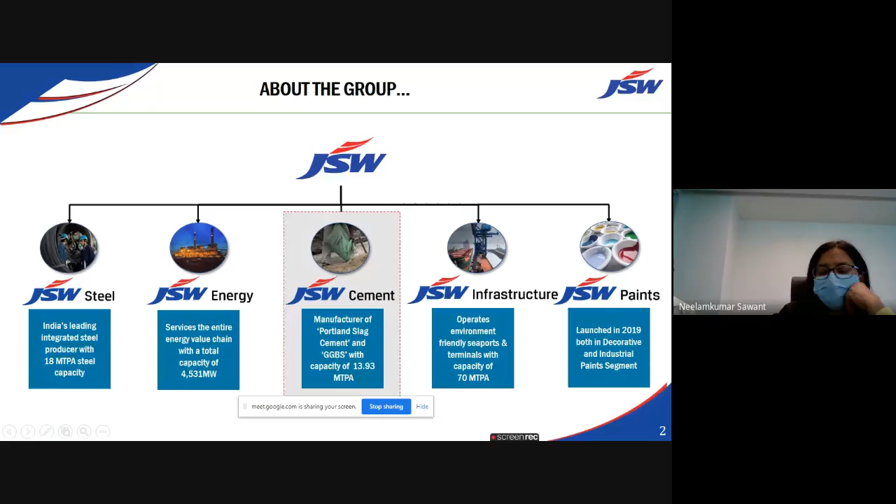We are into JSW Infrastructure in ports and terminals with capacity of 70 million ton per annum. In 2019, we have also launched paint. The paints are launched in the southern part of the country and west. So we go on to the vision and the core values of the group. Vision is global recognition for quality and efficiency while nurturing the society. Mission is supporting India's growth in core economic sector with speed and innovation, and core values are transparency, strive for excellence, and passion for learning.

So what are the various products JSW has which are green, environment friendly and have got very low carbon footprint? First is Portland slag cement, which is conforming to IS 455. Second is another variant of Portland slag cement, that is Concreel HD, also conforming to IS 455. Portland composite cement, conforming to IS 16415. Screened slag, IS 383. We are actually utilizing the slag which is coming out of the blast furnace, and that can also be used as a sand replacement.

So we all know, especially in the northern part of the country and also in the western part, sand is a big problem. Even in the south it has started. Getting river sand is practically impossible, and we should not get it because there are a lot of implications to taking sand out of the riverbed. It leads to the change of direction of the river, and it changes the topography of that area, not to say it spoils our mother nature.

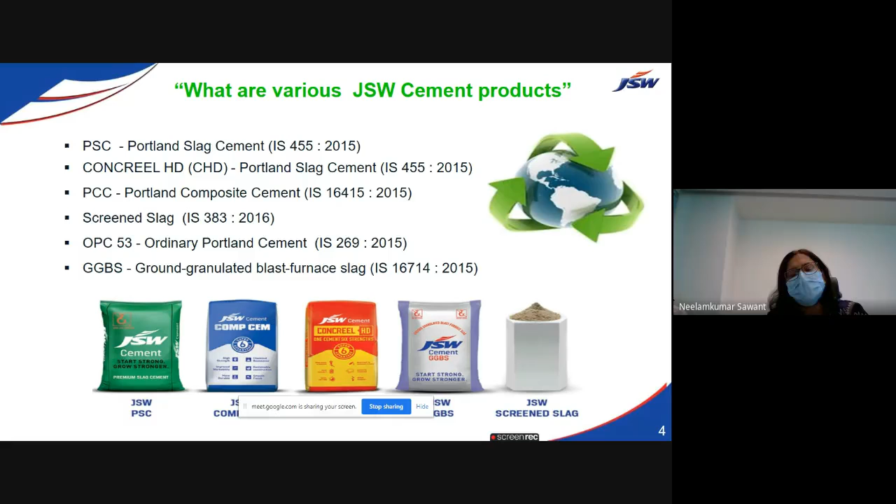So the chemical composition of slag as per IS 12089 and IS 16714. We can see it's a non-metallic product. It consists of silicates and aluminates of lime developed simultaneously with iron in the blast furnace, obtained by rapidly chilling or quenching with water or steam and air. Silica percentage is 27 to 32. The best part is this slag is equal to hydraulic cement because of the calcium oxide, the lime content, which is approximately 30 to 40%. If we compare slag with fly ash, you will see that the calcium oxide percentage in fly ash is less than 2, whereas in GGBS it is in the range of 30 to 40%.

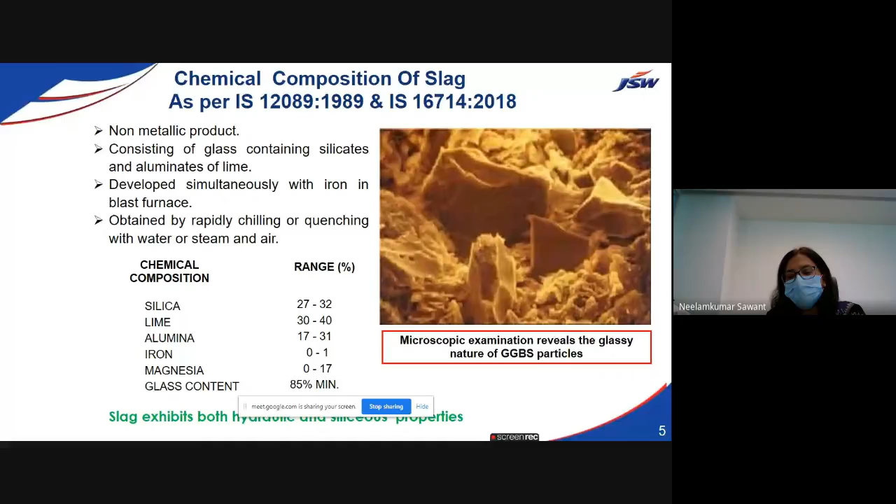Along with that are alumina, iron, magnesia, and the glass content is 85% minimum. The JSW slag GGBS glass content is between 90 to 97.5%. You can see the microscopic examination of the glassy nature of GGBS particle — highly reactive, highly siliceous, and also having a very good amount of calcium oxide.

Because it is a product of an industrial byproduct, it is a controlled byproduct. The steel which comes obviously goes through a very stringent process, and the slag which also comes out has a very, very high level of quality control and is of superior quality. There is no source to point source variation — it will be the same throughout the period of the year, as the iron ore source is fixed.

This conforms to IS 16714. This is a green product — CII and IGBC have given GGBS a Green Pro certification, and we have also got an Environment Product Declaration. This involves conservation of natural resources because it has been made from an industrial byproduct which, if not utilized, would have created a lot of problems in the earth's crust, as it would have been dumped and not utilized.

So this can be used as a partial replacement of OPC cement in concrete production at ready-mix concrete batching plants and site batching plants through high efficiency mixers. Utilization of GGBS will give high strength, chemical resistance, maximum durability, along with reduction of the heat of hydration.

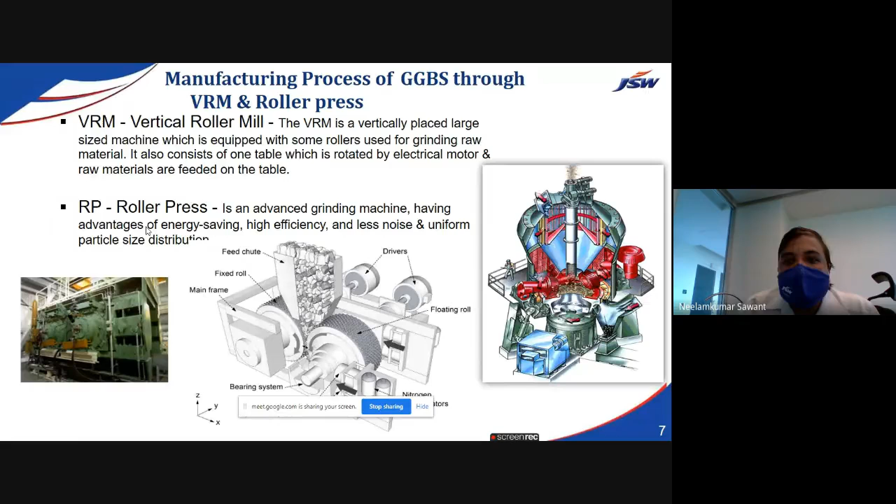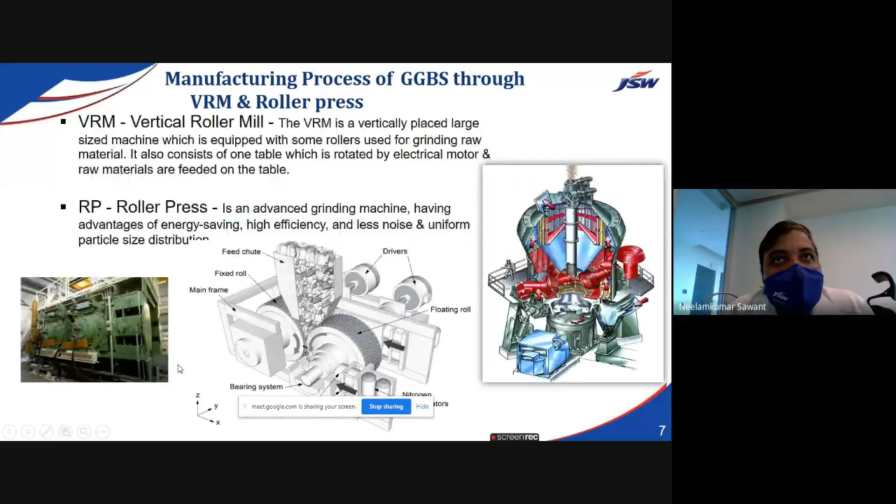So this is one of the pictures you are watching — on the right hand side is a vertical roller mill, and on the left hand side is a horizontal type of roller press machine. These are installed in our grinding units. One of the grinding units is located in Maharashtra.

We will see these are GGBS and fly ash. Both are cementitious products — they can be called mineral admixtures. Nowadays we are using plenty of these things, and GGBS has the IS code 16714 as previously stated, while fly ash has the IS code about 3812.

These are basically substances which are not chemically manufactured. As you know, in the morning's first session, there was a session taken by Kota Thermal Power where they described fly ash. Now we are more concentrated on GGBS.

So it is obtained by quenching the molten iron slag that you have seen in the previous slide. It is a byproduct of steel, and this blast furnace slag is quenched with a jet of water, then cooled down, and again ground down to a fine powder. That is called GGBS or GGBFS — ground granulated blast furnace slag.

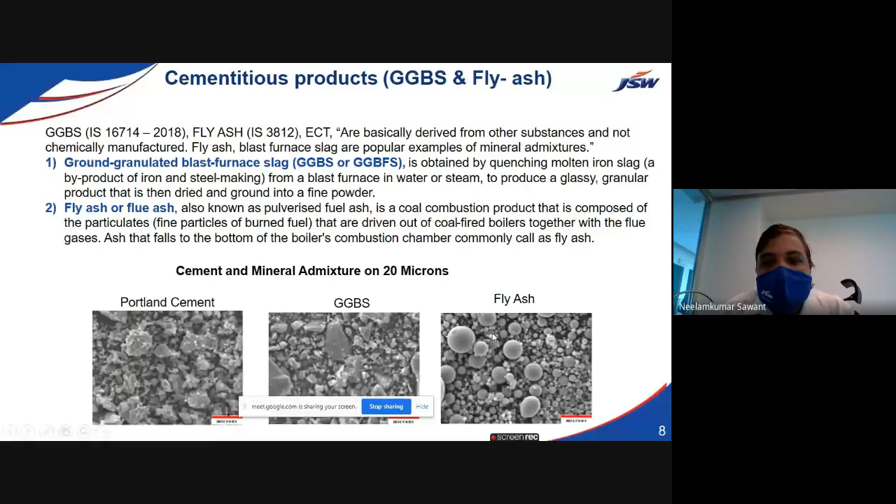We will see the GGBS versus fly ash comparison. The chemical composition, as ma'am Lopamudra told, this GGBS is having glass content more than 90 to 95% in our JSW product. So we will see calcium oxide in a normal cement clinker: 100% OPC has 62% CaO, that is calcium oxide, but as far as GGBS is concerned, it is about 40%, then silica content is about 35%, then aluminum oxide 14%, then magnesium oxide that is 8%, and ferrous also 0.5%.

These are the comparative figures shown in a table. We can observe the oxide content of 100% OPC as well as PSC as well as GGBS. So GGBS is having high silica content as well as calcium, or lime, also there. That's why it has extra cementitious property which can enhance the further gain of concrete as well as cement strength.

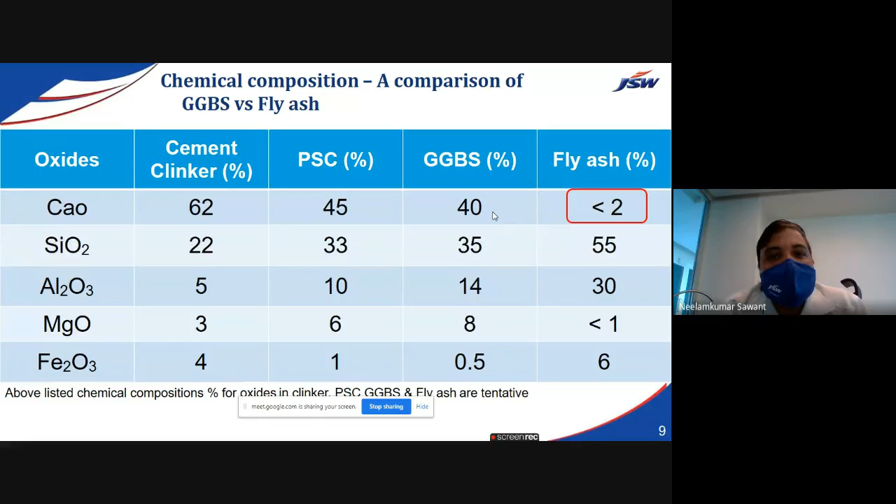Why GGBS is important and utilized in cement production as well as in concrete, we will see this chemical reaction. As we all know, whenever water is added in OPC cement powder, it forms some CSH gel, that is calcium silicate hydrate gel, in the primary reaction. This reaction is completed within 1 to 3 days, or 7 days. So GGBS has an added advantage over OPC as well as PPC because it increases the durability criteria.

Previously we were observing concretes about M20 grade, M30, M35 was the rare one. But nowadays, from the last decade, so many skyscrapers are there. Many infrastructure projects are going on all over India. So definitely high strength as well as durability criteria both are coming into consideration.

I will give you one example. In Mumbai, there are metro railway projects going on where the contractor has to meet durability criteria. The lifespan of that metro structure should be 120 years. So to achieve that durability, we should have some additional replacement to the OPC, the GGBS, because GGBS not only enhances the compressive strength of the concrete or cement, but it also adds durability.

So whenever this CSH, that is calcium silicate hydrate gel, is formed, some of the calcium is still there inside the concrete formation, and that is prone to environmental attack, this calcium hydroxide. And if I am going to add slag, that is GGBS, in my concrete proportion or in my cement, if it is PSC cement, which is a mixture of OPC plus this slag content, then definitely this slag comes into consideration in the secondary reaction, and it reacts with the calcium hydroxide.

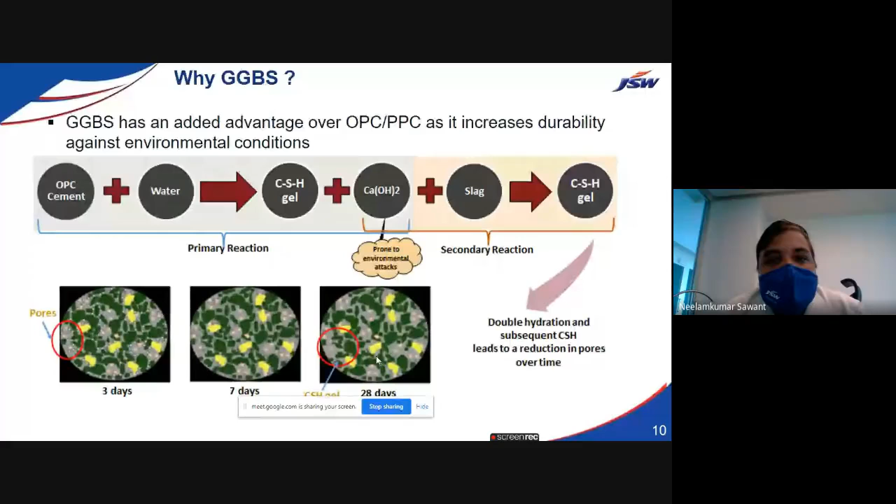That's why most of the GC, general construction and infrastructure companies, suggest PSC for foundation purposes, as well as pile cap and piling purposes. We will see why GGBS is also important in reinforced cement concrete.

As mentioned, whenever there is PSC concrete, it gives less cracking. If I'm using 100% OPC, there will be a lot of heat of hydration, so initial strength gain within 3 to 7 days will be much more, but it leads to superficial cracks and internal cracks also. But if I'm using PSC concrete, there will be less heat of hydration initially within 3 to 7 days, and after that gradual strength gain will be there, resulting in less cracking.

It definitely improves concrete properties, as the cement particles will be dispersed evenly. The particle size distribution or particle packing between coarse aggregate and fine aggregate will be good, in the primary reactions as well as the secondary reaction. So a complete dense matrix of the concrete will be achieved.

It definitely gives improved resistance to acid, chemical contents, chlorides, sulfates also, which are present in water, if it is a groundwater structure, a foundation structure, or a seashore jetty.

You can observe on the left hand side, this reinforcement bar which is in red color is rusted. And if you see the concrete cover, so many black dots are there, which is called porosity. This is the electromicrograph we achieved with concrete casted with OPC, and you can see more pores are there.

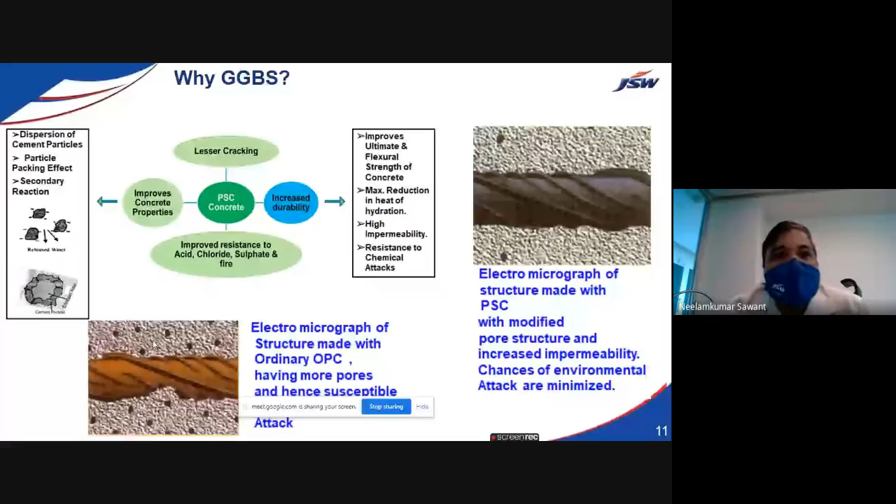We will see the advantages. It is a green product, as ma'am also told, a CII approved green product, and it is an eco-friendly cementitious product, having high resistance to chlorides and sulfates, reduction of heat of hydration, and improved ultimate strength. I will explain about ultimate strength.

We know, suppose I'm going to cast M20 concrete on site, then the concrete mix design will be done with the target mean strength, called TMS, that is FCK plus 1.65 times the standard deviation. So if I'm doing M20 grade concrete, the targeted mean strength should be 26 or 27, like that.

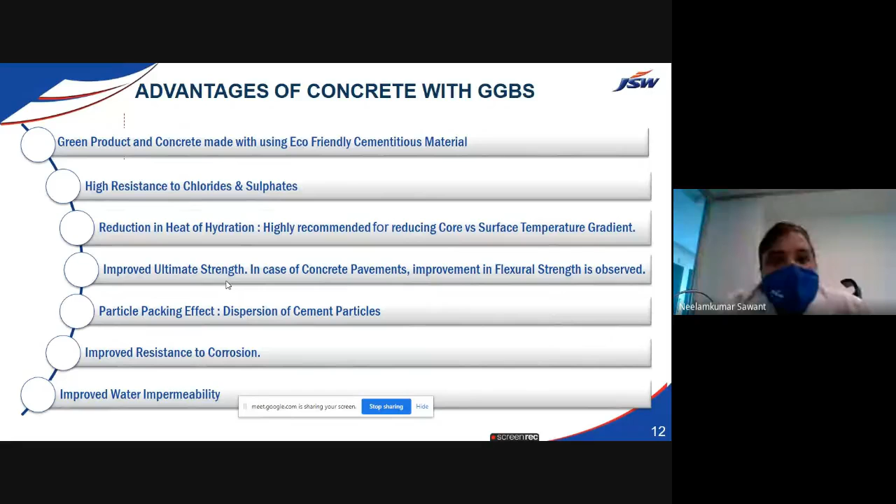So in that case, we should have the ultimate strength after 28 days also. If I'm using OPC in my concrete, after 28 days or within 1 month, the reaction of 100% OPC will be complete, and there will not be any further growth of concrete strength. But if I'm using GGBS, due to the secondary reaction, strength will continue to develop after 28 days, at 56 days, and up to 365 days (1 year).

This concrete strength will be enhanced, it will be increased about 10 to 18%, depending upon your workmanship and quality control at site also, but minimum 10% to 18% we can achieve. And definitely, if I am designing M20 grade of concrete, the TMS is about 27, and 27 into about 10 to 18% achievement will be there in the ultimate strength. Particle packing effect will be good, improved resistance to corrosion, as well as the water impermeability will be higher.

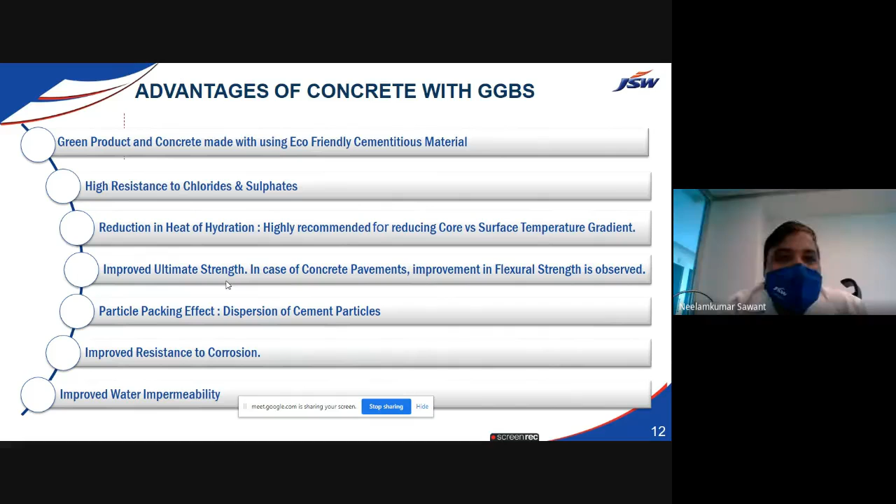GGBS advantages over the fly ash. We will compare the fly ash with the GGBS. Slag is a byproduct of steel, a blast furnace slag product, and fly ash is generally having silica content about 55%, but fly ash is having less hydraulic properties or cementitious property as compared to slag. So on the basis of replacement, as per the IS code, fly ash in the OPC can be replaced up to 15 to 35% as per IS 1489.

But as far as GGBS is concerned, trials are also done, very much research also done. So in OPC, replacing 25 to 70% as per IS 455 is allowed. And it depends upon your workmanship, quality control, and the target mean strength. On the basis of concrete performance, the concrete containing GGBS cement is having higher ultimate strength than 100% Portland or OPC cement, and concrete made with fly ash. Fly ash based concrete has a weaker RCPT, but for GGBS concrete the RCPT value is low, so water penetration is very less in GGBS made concrete.

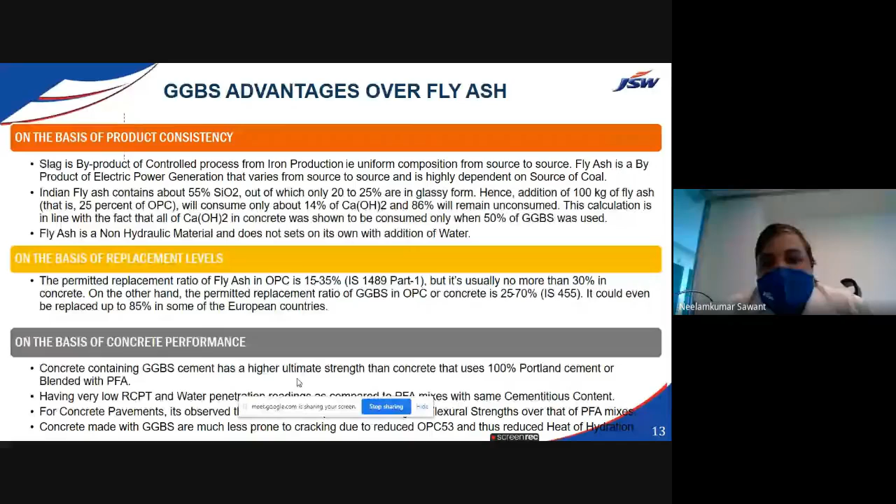And this May month also, we have received permission from the IRC, Indian Road Congress, to replace OPC cement by 20 to 30% with GGBS while casting pavement quality concrete or PQC. And it is having less cracking on the surface also. Less heat of hydration, definitely less superficial surface cracks. So GGBS has some advantages over fly ash, and we can definitely go for the option of GGBS.

We can see here concrete compressive strength as well as flexural strength development when casting M40 concrete with water cement ratio about 0.32. These are the researches we have done in IIT Mumbai and also in our concrete lab. If I'm taking OPC, it requires 450 kilogram per meter cube for casting M40. After 28 days, 56 days, and 90 days, the target mean strength for M40 is achieving 48.4, and after 90 days it is hardly a gain of 2 to 3 MPa.

If I do partial replacement of OPC by 21% with fly ash, we can see at 28 days it is less, 47.5, compared to pure OPC, and after 90 days it is 51.5. And if I use replacement of OPC by 40% GGBS, the strength is equal to OPC, 48.9 MPa at 28 days, and after 56 days it increases to about 55.6, that is 4 to 5 MPa increase, and after 90 days it is 61 MPa, meaning a drastic 9 to 10 MPa additional strength I am getting by replacing OPC with GGBS 40%.

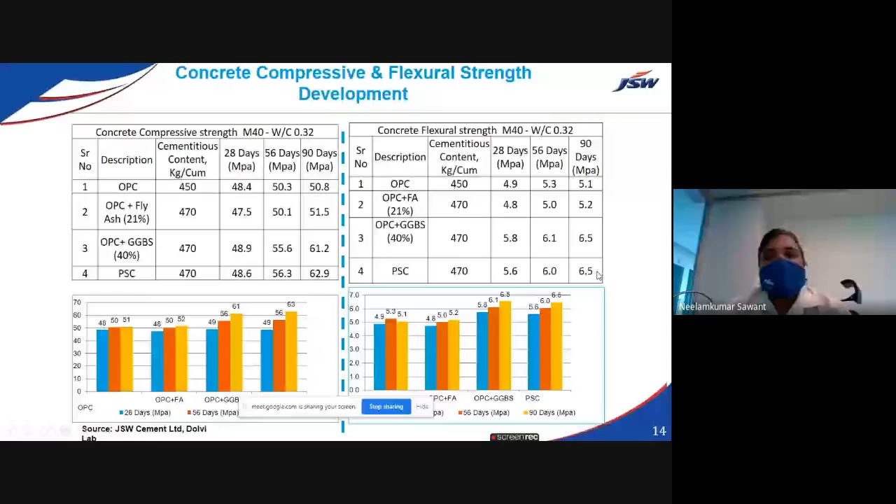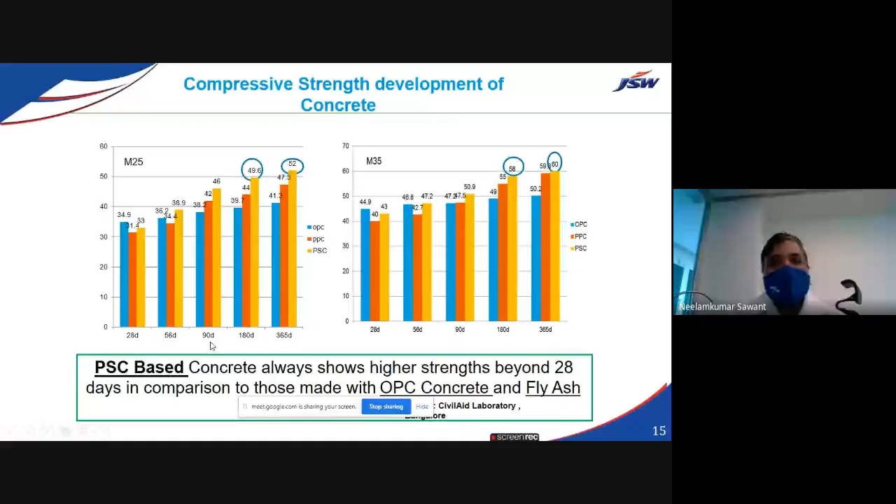You can see over there, PSC-based concrete always shows higher strength beyond 28 days. This is a graph we have charted. The previous one was the example for M40. This is the example for M25 as well as M35. Why are we showing these graphs? Because generally M20 to M40 are the commonly used concrete grades in India. So concrete always shows the highest strength after 28 days whenever PSC-based concrete is considered.

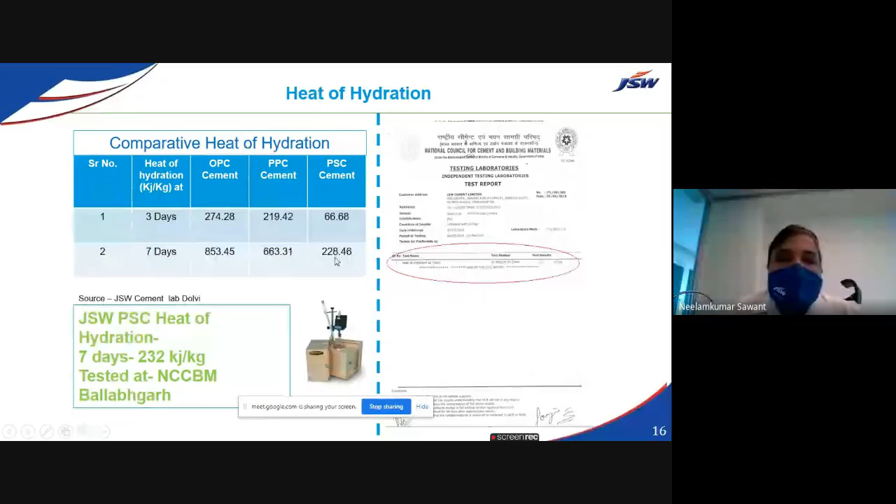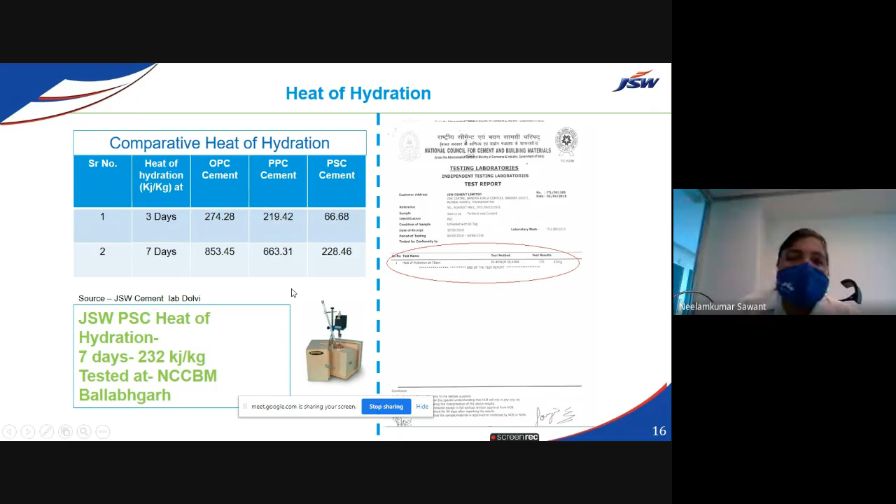So naturally, after 7 days also, this is 850 as compared to 225. That is, only about 25% of the heat is evolved. So definitely PSC cement is very good. It is also tested in NCCBM, Ballabhgarh, in Haryana, and this is a proven track record. You can observe the heat of hydration is very low as compared to OPC. This is the same thing we have observed.

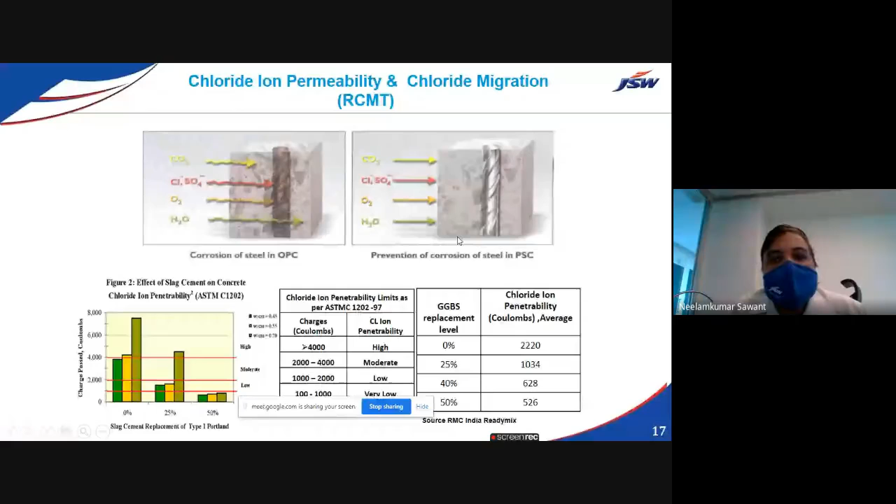If I'm casting any concrete with 100% OPC, there will be ingress of carbon dioxide from the environment, and water, chlorides, sulfates, oxygen and H2O, which will deteriorate your reinforcement steel and corrode it. But whenever I am using GGBS replacement, the chloride penetration Coulomb values are mentioned in the table. These are the studies we have done as per ASTM, and definitely you will get good resistance to the ingress of these external enemies, which should not deteriorate your reinforcement steel as well as the concrete.

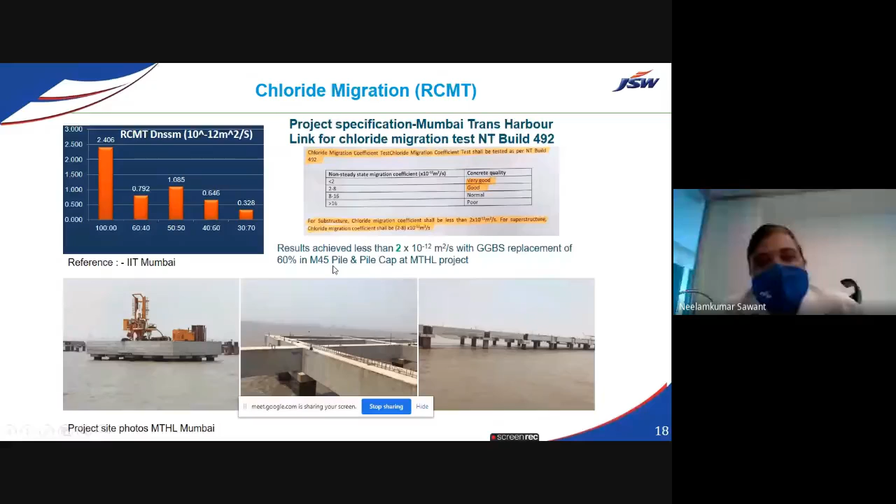You can see the migration coefficient is less than 2. Whenever it is less than 2, the concrete quality is very good, and if it is 2 to 8, then it is good. The migration values are all mentioned in this table, and we are getting results less than 2 with about 60% GGBS replacement in M45 grade for pile casting as well as pile caps for these projects. So these are the proven track records.

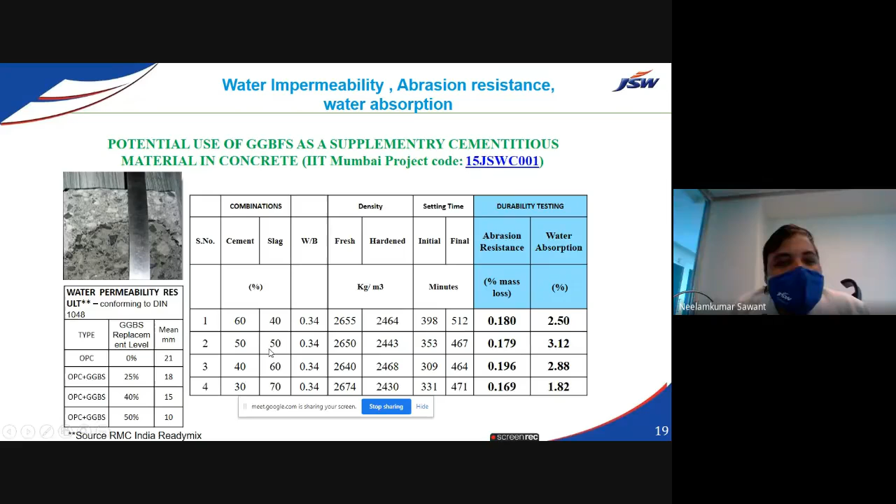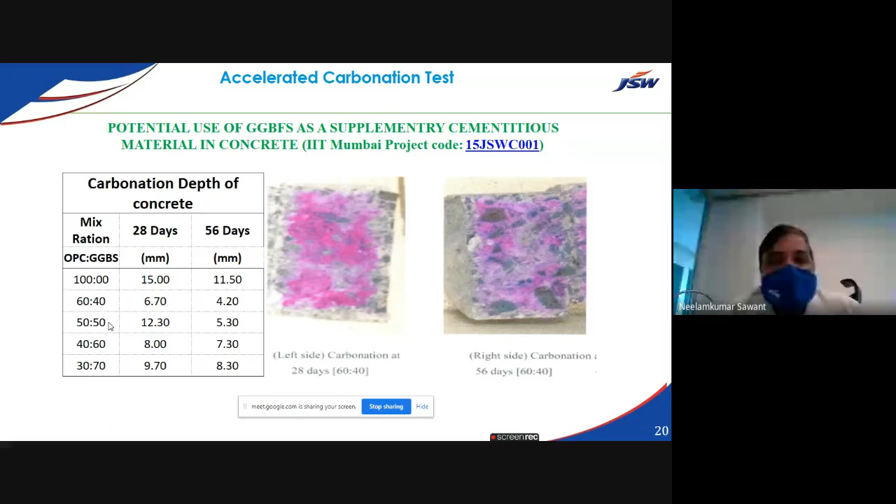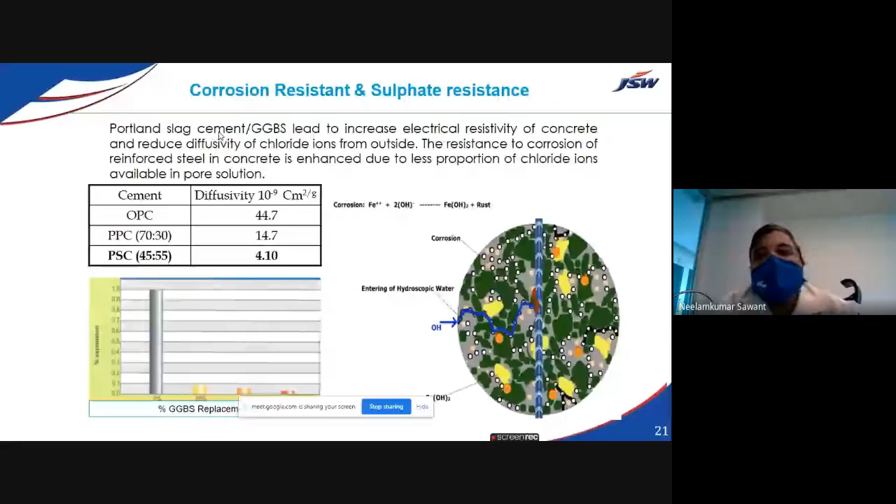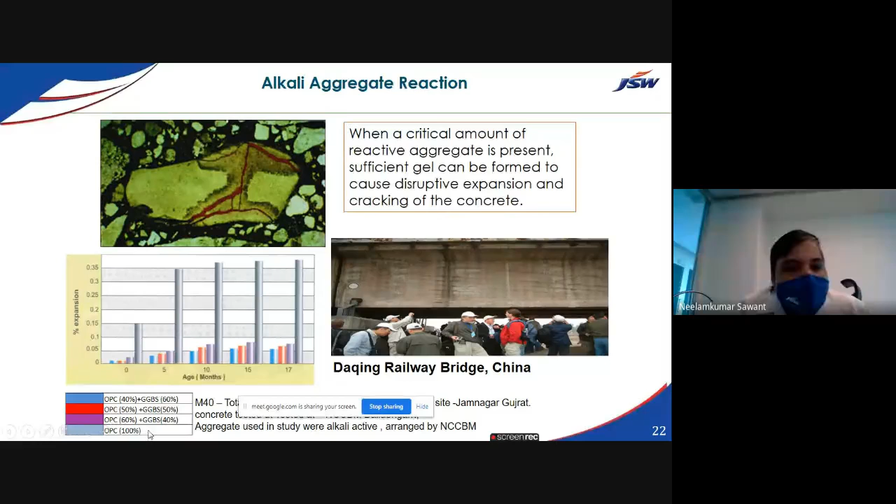You can see on the right hand side a concrete girder. You can see on the surface some signs of this bulging, that is ettringite formation. You can also observe it in some canal lining RCC structures, where this alkali reaction comes out. OPC alone is harmful for the concrete, and whenever I am using OPC 40% and GGBS 60% replacement, ettringite will not be formed. With OPC 100%, ettringite will form because of the alkali aggregate reaction.

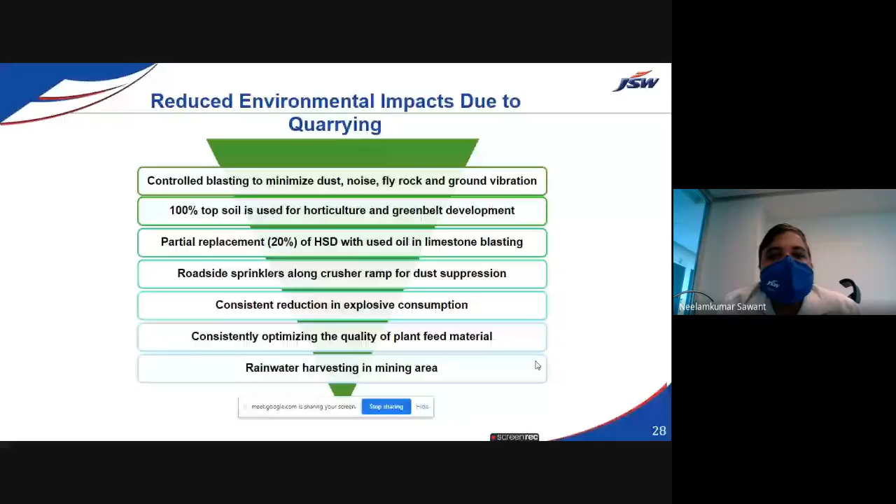We will see while quarrying, before taking the raw material for the manufacture of our cement, limestone is also utilized. So we are having controlled blasting nearby our plants, and while blasting we are minimizing the dust, noise, fly rock and ground vibration by other mechanical means. And whatever the topsoil is there nearby our plant location, we have already cultivated, and horticulture is also there. It's a green belt, so that greenery and the O2 emission should be there.

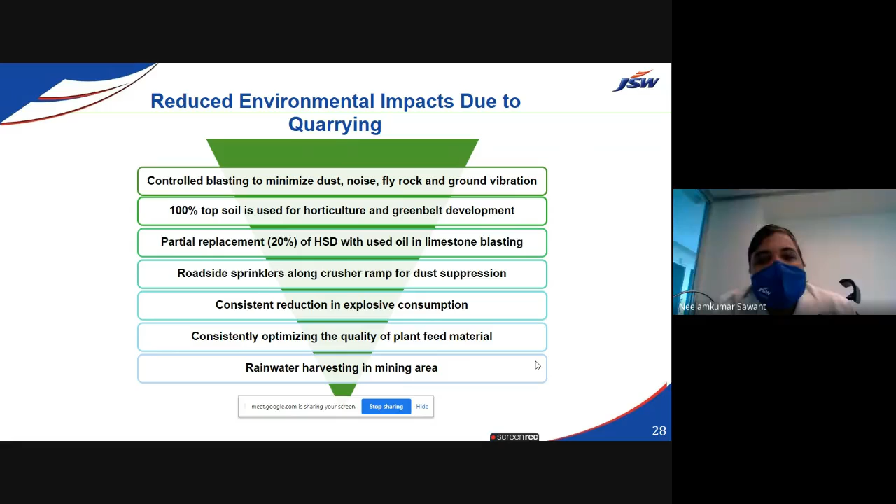To counteract the air pollution and the dusting, roadside sprinklers are also installed nearby our plant area, and we are consistently optimizing the quality of the plant feed material by reducing the energy as well as controlling the noise and dust. And water conservation is also there, because we are doing rainwater harvesting in our plant area and nearby areas and villages, so that this water will be recirculated and again reutilized.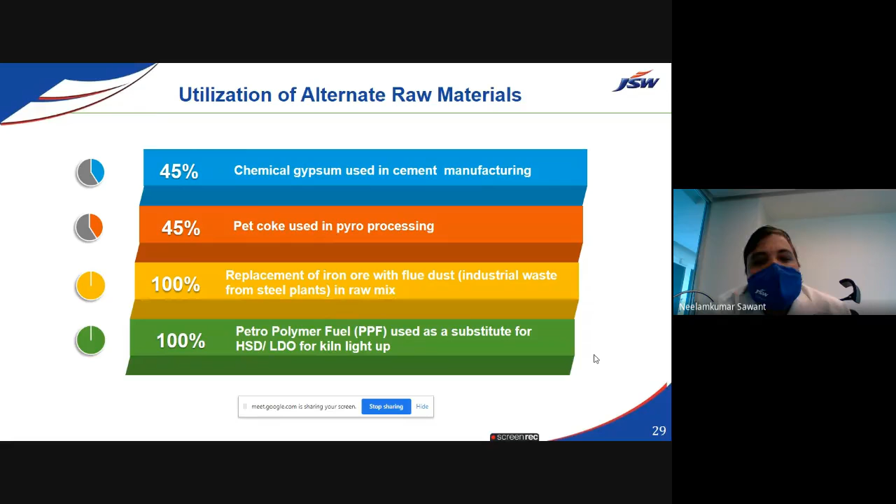You can see over here in a graphical format, in our company, while producing GGBS as well as PSC cement, limestone consumption: in 2012 about 1.157 tons per ton of cementitious material was produced, and nowadays we have drastically reduced the limestone consumption for producing PSC. So about 66% reduction is there, definitely serving nature. Gypsum, as I mentioned, we are using chemical gypsum, so gypsum consumption per ton of cement production is also drastically reduced from 0.05 to 0.02.

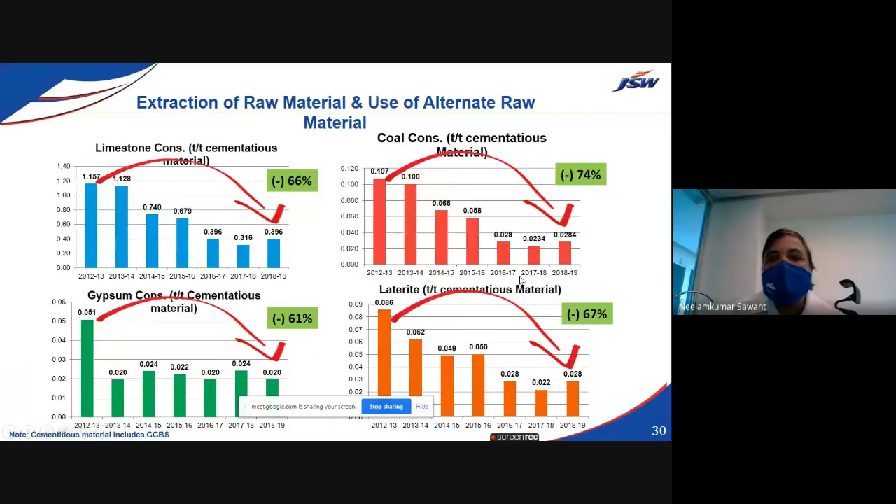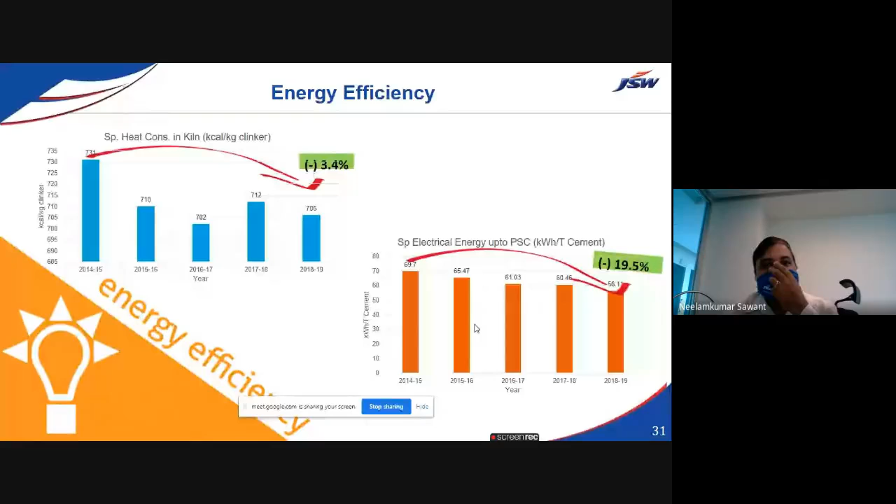It is 61%. Then the coal, which is utilized as fuel during production of the cement, has about 74% reduction. And laterite is one of the stones generally used as a raw material for the production of cement. So we are also conserving about 67% of it by replacement with GGBS. You can see we have all 6 plants in India. Those are the energy efficiency figures.

So you can see from the graph, previously in the year 2014, about 731 kilocalories per kilogram of clinker production was evolved, but nowadays it is reduced by 3.4%. And electrical energy is also reduced by 19% because we are using alternative sources of energy.

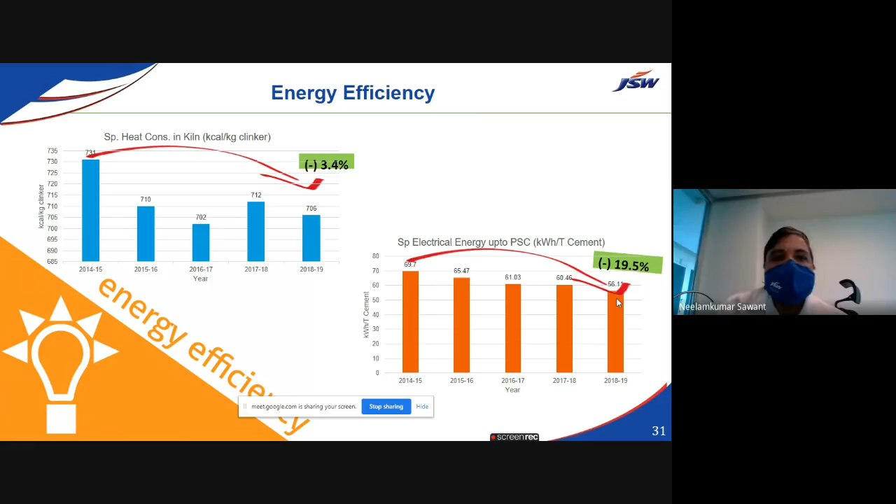Water is important for the production of cement because there are the dry process and the wet process for cement manufacturing. So you can see from these graphs, specific water consumption for process cooling: in the year 2012, we were consuming about 0.0491 cubic meters of water for producing 1 ton of cement, but nowadays it is reduced by about 45%. And water consumption for producing this cementitious product in the final stage is also drastically reduced by 73%.

So what is the important thing? We are recirculating things, and JSW is one of the cement companies having water positive units, and we are continuously recharging groundwater to increase it so that we can recirculate it and use it for cement production.

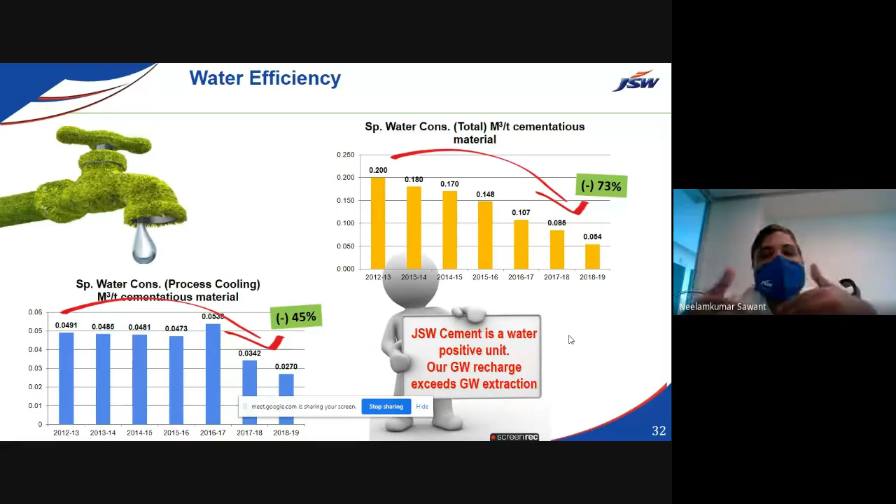CO2, that is carbon dioxide emissions. Definitely there is reluctance or opposition from the nearby areas wherever our plants are located. But nowadays baghouse filters and electrostatic precipitators are installed to capture the floating particles of GGBS as well as the cement particles, and again those are recirculated for manufacturing the cement.

So you can see over here, CO2 emission is drastically reduced by 33%. We were previously producing 443 kilograms of carbon dioxide for producing 1 ton of PSC. Nowadays it is about 296, so reduced by about 33%. We can have the comparative study over here.

If the material is clinker or 100% OPC, for 100% OPC production, 769 kilograms of carbon dioxide is evolved in the environment. While producing PPC, about 566 kilograms of carbon dioxide is evolved. And while producing PSC as well as GGBS, this is drastically reduced to about 429 to 65 kilograms. So compared to OPC, about 50% of carbon dioxide is evolved in PSC manufacturing.

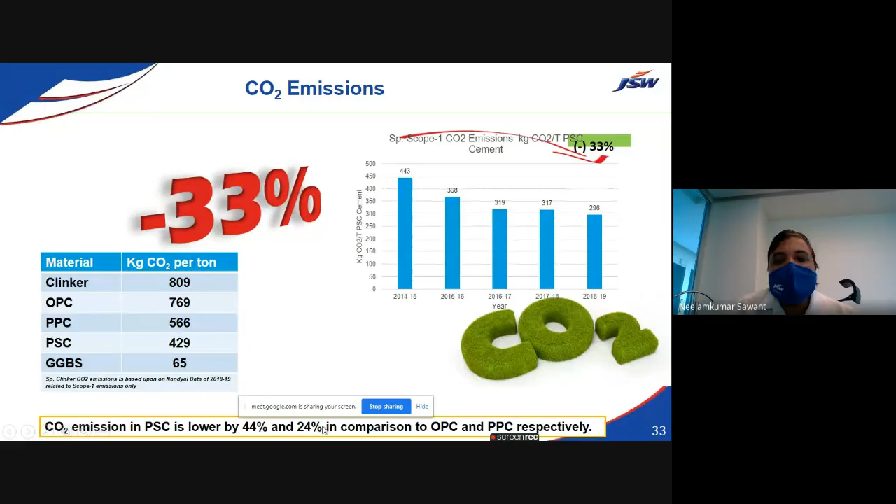So we can imply that CO2 emission in PSC is lower by about 44% compared to OPC, and 24% compared to PPC type cement manufacturing. Eco-friendly product: we can see over here the CO2 certification, and for GGBS manufacturing, generally 52 kilograms of CO2 is evolved. This is one of the test certificate results.

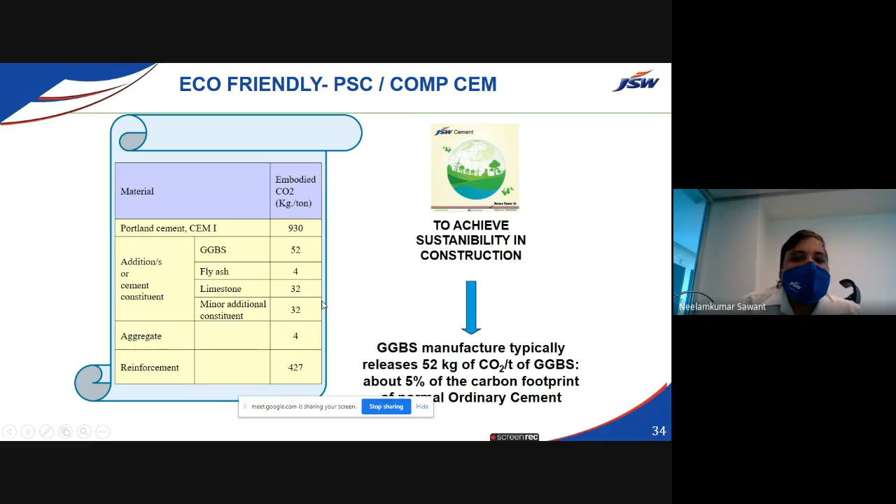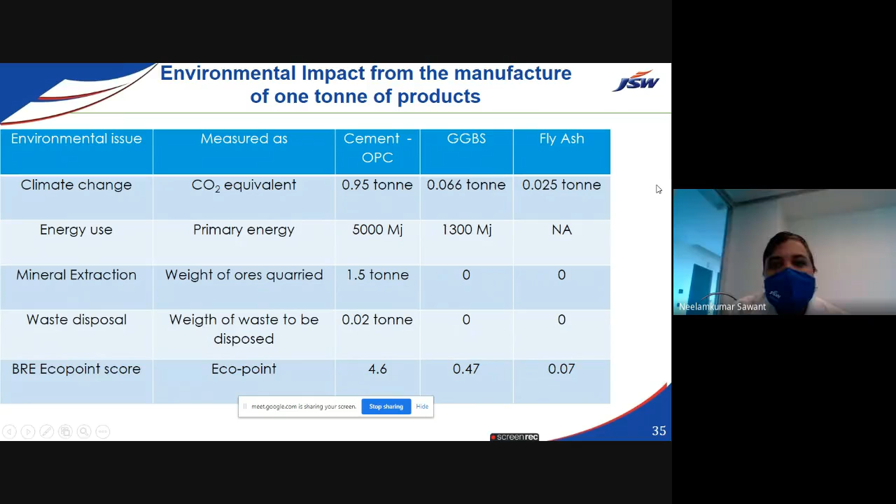And definitely there is the greenhouse effect. Generally we are discussing CO2 emissions. Whenever I am using 100% OPC for manufacturing concrete, about 142 kilograms of CO2 evolution is there. Whenever I replace 50% of this OPC with GGBS, it is reduced to about 60%, and whenever I replace about 30% with fly ash, it is 83%. Definitely the use of GGBS is much more beneficial with respect to CO2 emission.

Energy use: compared to OPC, the energy for GGBS is less, we are utilizing only 71%, and mineral extraction is 92%. So this is the comparative study of environmental impact for producing 1 ton of concrete.

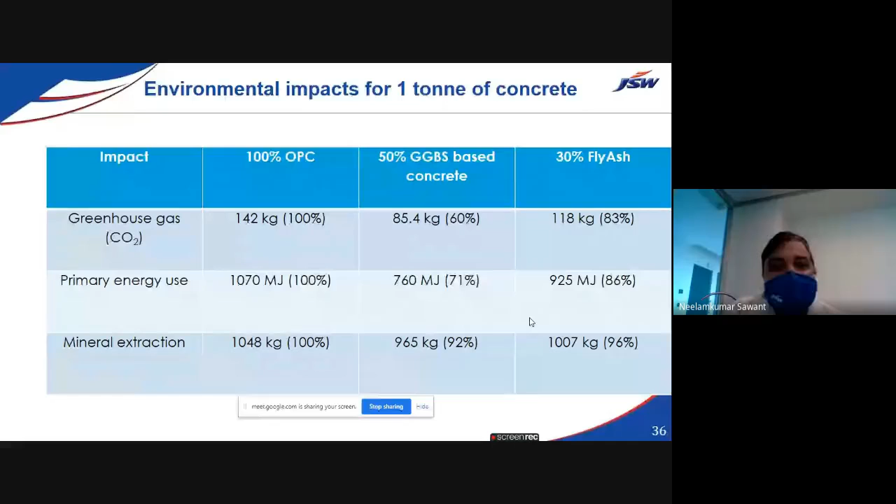And you can see generally in India, M30 and M40 concrete are mostly utilized for infrastructure projects and are commonly used grades. For example, this is M30 concrete. If I cast concrete with GGBS plus OPC, OPC 30% and GGBS about 70%, then the CO2 is about 139. And if I'm using 100% OPC with 0 GGBS, the CO2 emission is about 370.

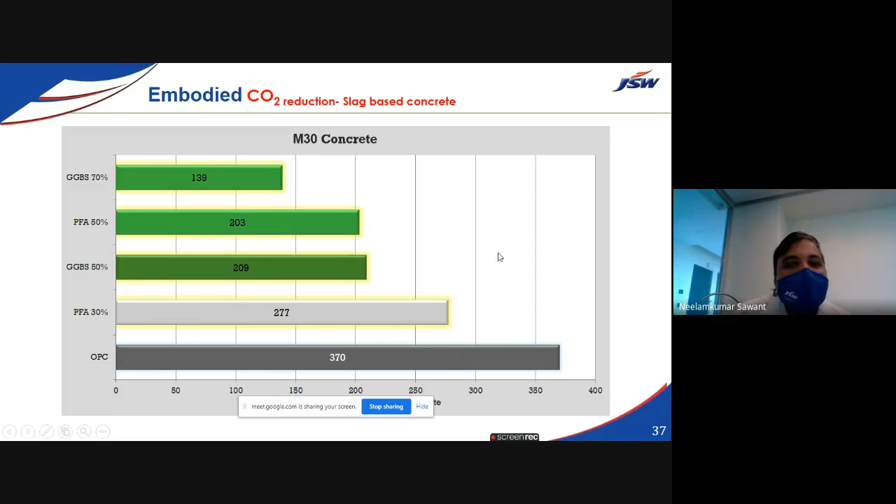Definitely there is pollution of air, water and land, and we want a pollution-free environment which ensures no adverse impact on human health. By utilizing GGBS and other byproducts, we are minimizing the burden on the land, because previously, before use in the construction sector, these slag-based products and GGBS were used for landfilling purposes, but now they are used for concrete making.

The burden on the lands is reduced, and we also reduce virgin material because limestone is preserved, giving a vast saving in limestone in the environment. We reduce fossil fuel use too, because we are using alternative resources for energy. And definitely GHG emissions are reduced, which is important from the global warming point of view. We are directly contributing to reversing the effect of global warming, since this is a 21st century global problem in front of us.

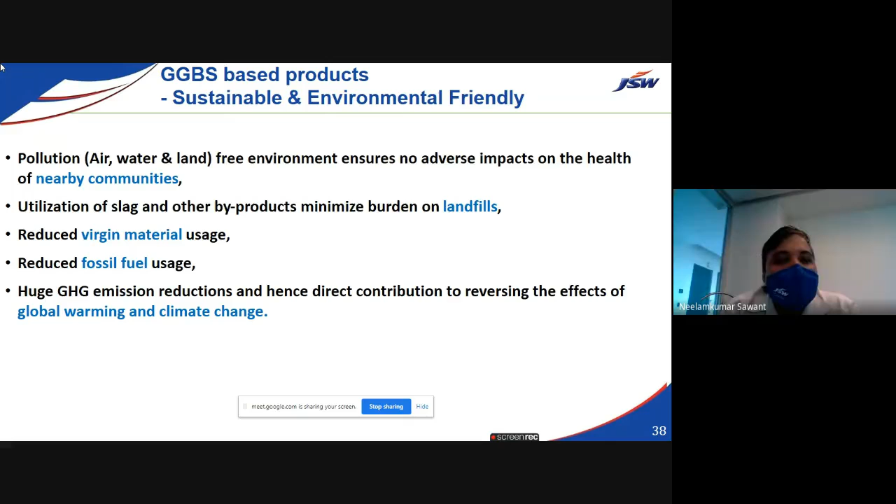We can see some pioneer projects and structures built with the replacement of OPC with GGBS, partial replacement of 40, 60, or 50%. In India, there is the Bhakra Nangal Dam on the north side of India, which is also constructed with the replacement of OPC with GGBS.

As far as projects abroad are concerned, there is a sea bridge, a cable stay bridge, whose pillars and piers are constructed with GGBS admixture, this mineral admixture replacement, and that is in Japan. Then in Norway also, there is a national road where concrete up to M80 grade can be produced with the help of GGBS as an OPC combination.

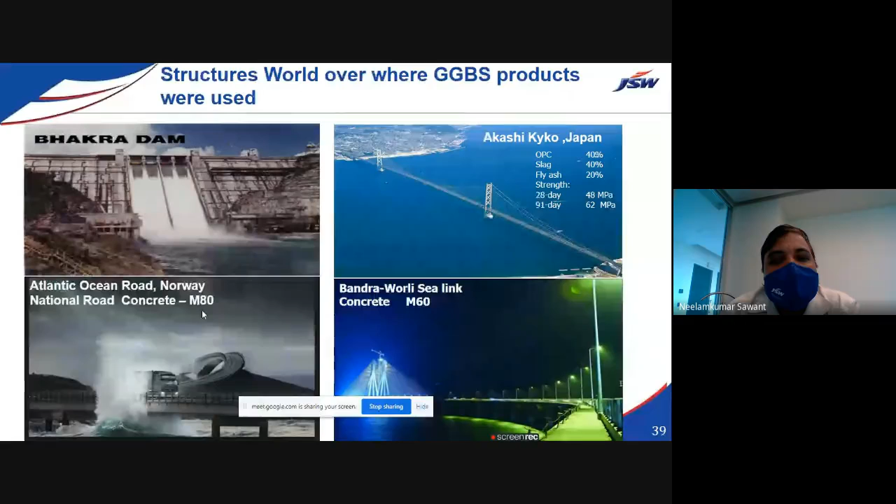As far as India is concerned, in Mumbai there is the Bandra-Worli Sea link project. We have also produced about M60 high grade concrete for piers, and this is produced with the help of OPC plus GGBS combination.

This is from all of us, from the umbrella of JSW company. We have JSW PSC Portland Slag Cement, JSW GGBS, and we also have GBS, that is granulated blast furnace slag, which can be utilized as an 80 to 100% replacement while plastering as well as in concrete. It gives good strength and good abrasion resistance for the concrete.

And we also have normal GGBS. One can blend their OPC with GGBS to produce concrete from M20 to M60 grade, which not only increases the compressive strength of the concrete, but also gives durability, extending the life of your infrastructure and concrete. This is all from us regarding GGBS based products and our JSW cement.